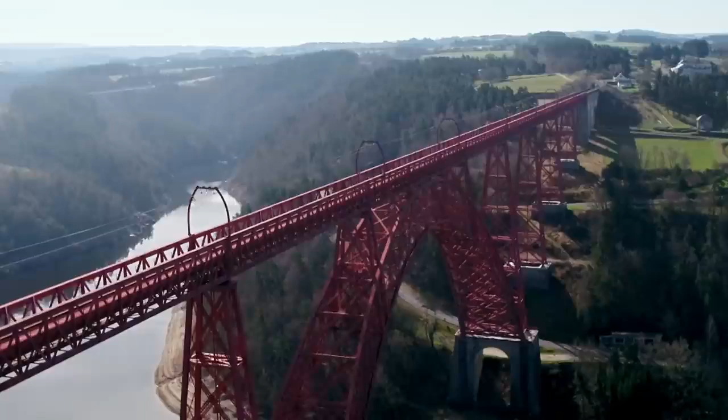Reaching the world on the other side, crossing the bay. First a curiosity, then a necessity, one which has urged man from the dawn of his history to develop construction methods that enable him to cross barriers. But bridges are more than just technological feats. They are links between men.

Leah Bello is a geophysicist. She'll be following in the footsteps of exceptional builders, revealing the secrets behind the construction of iconic works, and discovering the challenges faced by engineers who build even higher and even further.

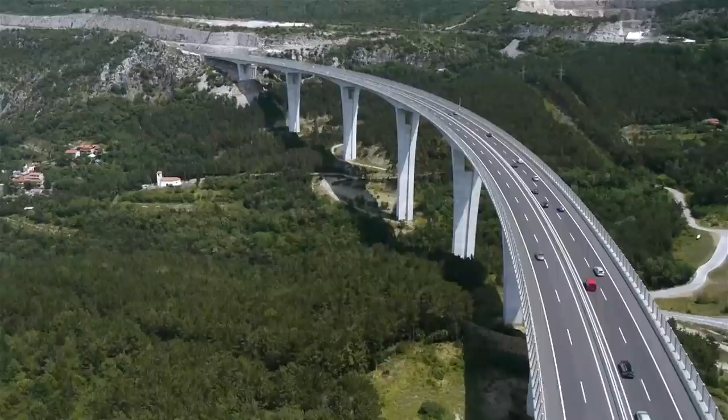No engineer in his right mind would have chosen this place to build a bridge. Unfortunately, that was where a bridge was needed. A scientific investigation to discover how men design and construct civil structures. True expressions of human genius to bridge the gap.

Leah Bello first heads to northeast India and the state of Meghalaya to discover a hidden treasure. Located on the border with Bangladesh, a third of the state is covered by dense, damp forest. Numerous streams wind through the valley, representing obstacles for the movements of the villagers. For almost 500 years, they have intelligently tamed nature by building bridges, using the roots of living trees.

Be careful, it's very slippery. Slowly. Here is the bridge for you, the living root bridge. See the roots. It's like something out of a fairy tale. Is the bridge still in use? Every day. Every day we have people living in the village on the top. They come through this to go to their garden. Monsoon time, it's so much water. Without this bridge, they cannot cross this.

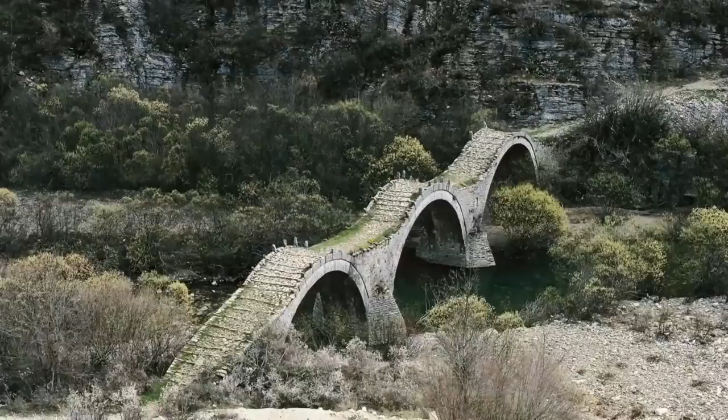The first bridges in history were all built using plants or plant-based materials, vines, rope, wooden planks, and so on. Primitive bridges, which are still constructed and maintained in some parts of the world, like in the foothills of the Himalayas. In less forested areas, man turned to a more resistant material, stone. Some of these prehistoric bridges still stand today. During the final millennia before our era, stone dominated the history of bridge building until the Romans perfected the art.

For almost 5 centuries, the Roman Empire reigned over Europe and the Mediterranean. To expand their territory, the Romans developed an important network of roads and bridges. This construction-minded people built numerous large-scale structures in stone, some of which are still standing after 2,000 years, like the Pont du Gard in the south of France, which was constructed in the middle of the 1st century of our era.

Its dimensions are impressive, 47.6 meters high, with a span of 275 meters. This iconic vestige is the highest elevated Roman aqueduct bridge in the world. From the bottom up, its 3 tiers have 6, 11 and 35 arches respectively. Vaulting has been used since the Mesopotamian period, but not all the time. The solution discovered by the Romans was to build semicircular arches with centering, with the lateral thrust exerted on piles with very strong foundations. This produced much wider arch spans, from a few meters to 35 meters across.

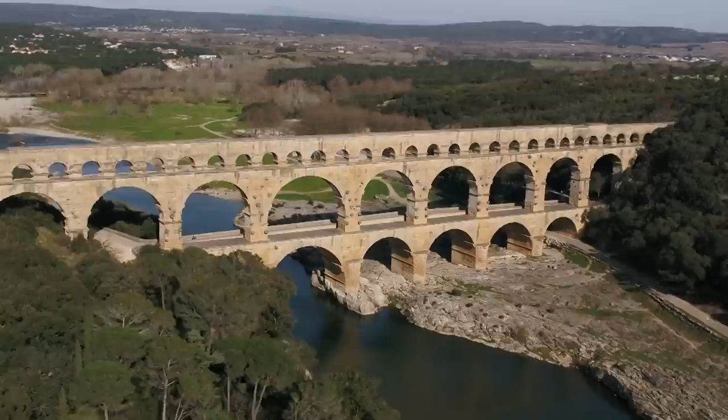Once the piles were sunk into the riverbed, the next task was to construct the archways. The semicircular vaulting forms a structure which can span an empty space with successive arches. To build the arches, a solid support was needed, known as a centering. This constituted 2 wooden semicircles with the same form as the intended arch and served as the framework. The blocks of stone were then laid on top of the wooden centering until the last one, the keystone.

On the first tier of the bridge, the arches were thus formed with 3 parallel sections of stones. This form allowed the Romans to build arches with unprecedented spans. But it did have its limits. If an arch were to span more than 40 meters, the quantity of stone would be too heavy and the vaulting would collapse under its own weight.

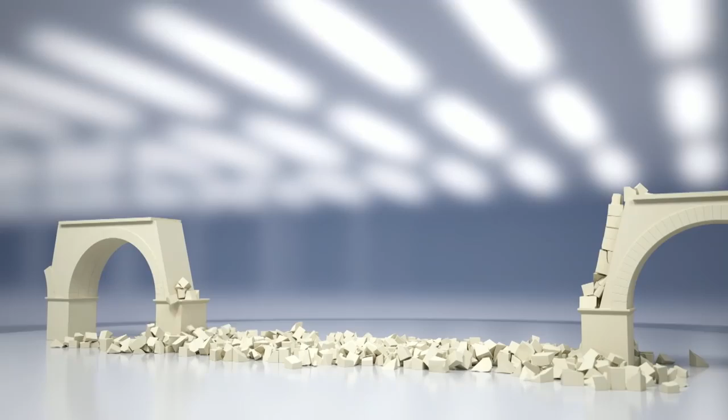It's often said that the Romans were the greatest builders in antiquity. But what do we know about the exact construction techniques and methods they used? We know a huge number of things, but not everything. Firstly, their construction techniques were absolutely remarkable. Their level of engineering clearly surpassed that of the ancient Greeks, who were also great engineers. And Vitruvius, the Roman architect and engineer, left us the only known book on the subject, which we can now consult for all our studies of the archaeology of antiquity.

Vitruvius was the author of the only surviving treatise on the architecture of antiquity. It's an exposé of the art of Roman construction, and it lists the tools and techniques employed by these master builders. From a theoretical point of view, we learn of their acute sense of proportion. The lines of their buildings form harmonious dimensions and employ incommensurable numbers such as pi or the square roots of 3 and 5.

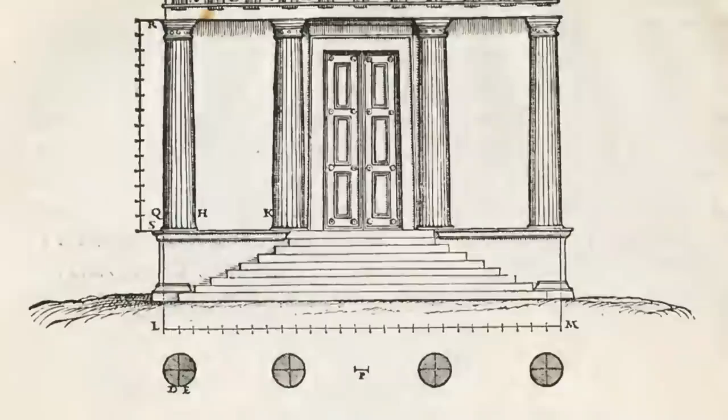The Romans set out to construct for eternity. Their use of infinite numbers actually enabled them to obtain the absolute. And also, thanks to this geometrical system, stonemasons also knew the methods perfectly. And so they could reproduce on the spot, on a much larger scale, of course, the plans which had been drawn by the architect.

While the Pont du Gard remains a model of aestheticism and architectural perfection, it was actually constructed for a very precise purpose: to bring fresh water to Nîmes, one of the largest cities in Gaul, with 20,000 inhabitants. The spring chosen was the Fontaine d'Eure, some 50 kilometers away from Nîmes. The distance wasn't a problem for the architects, but something else was. They had hoped to find a spring much higher up than the arrival point. But unfortunately, the Fontaine d'Eure was only 12 meters higher.

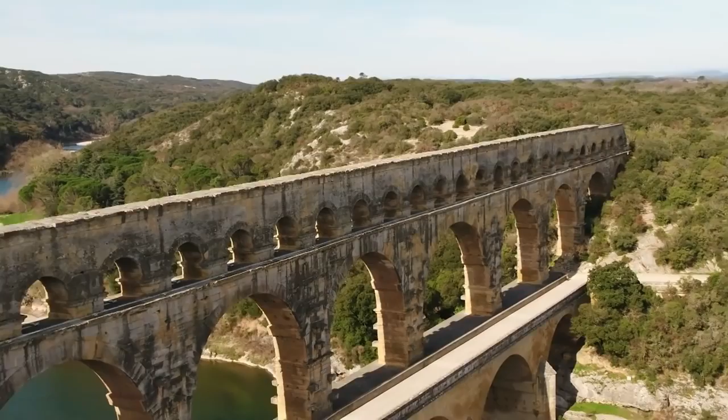That meant the builders had to construct an aqueduct with an extremely gentle slope, one of the gentlest in antiquity. How gentle was it? 24 centimeters per kilometer, a gradient equivalent to only 1 millimetre every 4 metres. And without expert calculations, it was impossible to ensure a regular slope along the full 50 kilometres of the aqueduct, especially across the Pont du Gard.

That means that you have a channel with a slope like this, fairly steep, followed by a very gentle slope, and then another steepish one. So in the central part, the bridge, water flowed much more slowly. So the result is the water rose in the channel, and once the aqueduct was in service, they realized that it overflowed from the Pont du Gard. So the original wall only came up to here, and to stop the water overflowing, they had to build up to here? Exactly.

This masterwork of antiquity supplied Nîmes with water for almost 500 years, until the fall of the Roman Empire. The construction of immense architectural and engineering works disappeared with the Dark Ages and was only resumed 500 years later, in around the year 1000, with the expansion of Christendom and the power of the Church. The builders of the Middle Ages readopted the techniques and methods of Roman architects.

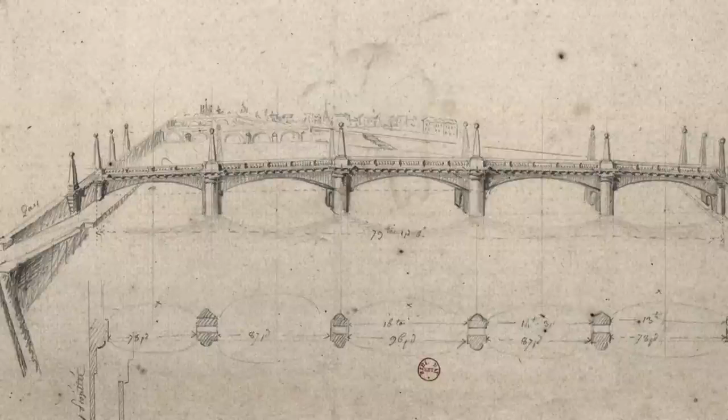But it wasn't until the middle of the 18th century that the first big technological break came, with Jean-Rodolphe Perronet. Considered to be the father of modern engineering, he was also the first to understand the true mechanics of a stone-arched bridge. He established that each arch was not freestanding from the others, and that the thrust was shared between the spans. This crucial observation meant that the thickness of a bridge's piles could be considerably reduced.

Perronet halved the thickness of the piles. He developed an understanding, somewhat systematic, one could say today, of how bridges functioned. So he built bridges in a different way to traditional ones. With his bridges, the thrust of each span kept the others in equilibrium, unlike the Pont d'Avignon, where if one arch collapsed, others might yield. The arches of the modern bridge were much more interlinked, and the thrust went from arch to arch, right to the abutments. Stone thus dominated the history of bridges until the Industrial Revolution.

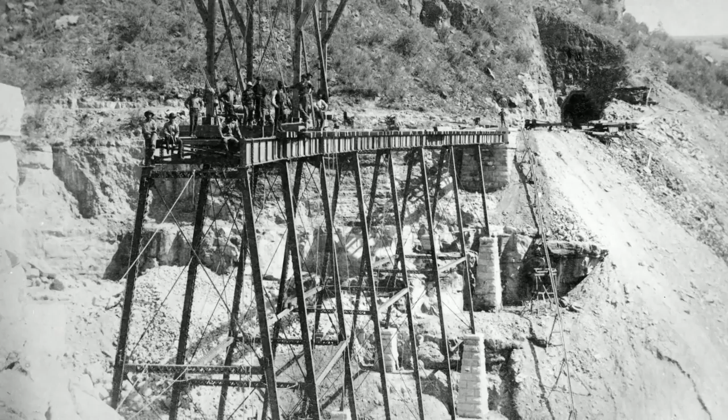In the late 18th century, early 19th century, the mastery of iron allowed engineers to design structures with new profiles. Iron was the great revolution for bridges. It was about 60 times more resistant to pressure and thrust than stone, and that would lead to considerably lighter structures. Iron resisted tensile strength as well as pressure. That meant that architects could finally drop the arch, which had been the dominant form of bridges since Roman times. Iron enabled builders to construct bridges with triangular crossbars. Both lighter and more resistant, bridges could span even greater distances.

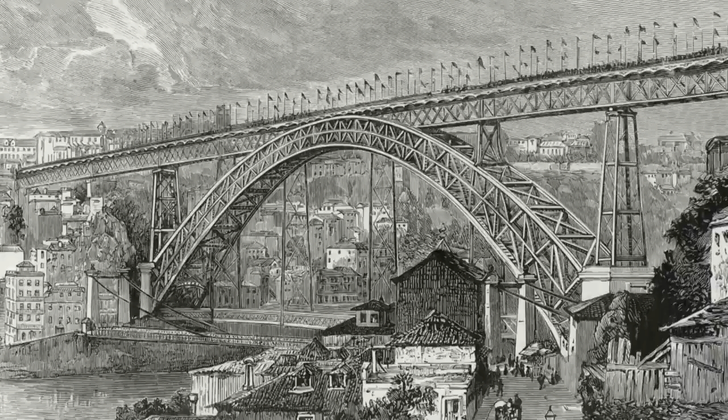The rapid development of the railways demanded new technological solutions to cross rivers and valleys. Engineers stopped at nothing, like spanning the deepest gorges where no one had ever dreamed of taking on nature, and bridging the gap. The Garabit Viaduct is a striking example of this daring. It was designed by Gustave Eiffel, a visionary engineer and determined architect, whose solid yet elegant bridges reached heights that gave his contemporaries vertigo. Located in the heart of the Massif Central, the Garabit Viaduct crosses extremely undulating terrain. 565 metres long and 120 metres high, the rail bridge rests on 7 piles and a single main arch with a span of 165 metres.

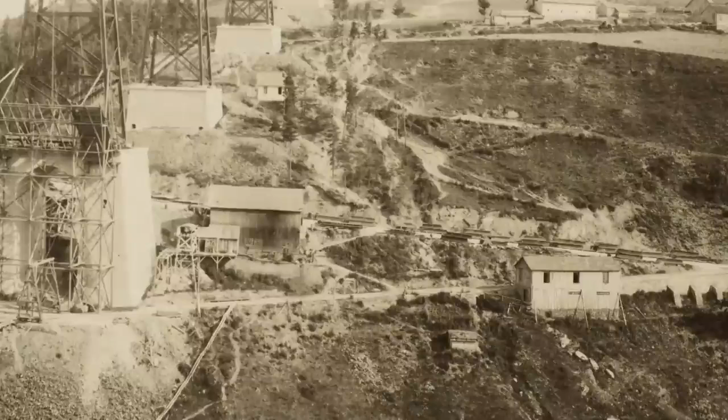What was there here before the construction of the bridge? Nothing. At Garabit, absolutely nothing. They had to lay new roads just to get to the site. Then they had to construct accommodation for the men who would work on the viaduct. Why construct a bridge where nothing existed? So that the train, with its passengers and goods, could reach the region. As rail was developing everywhere in France, there was still no line through the Cantal department linking Paris directly with Béziers, without skirting around the Massif Central.

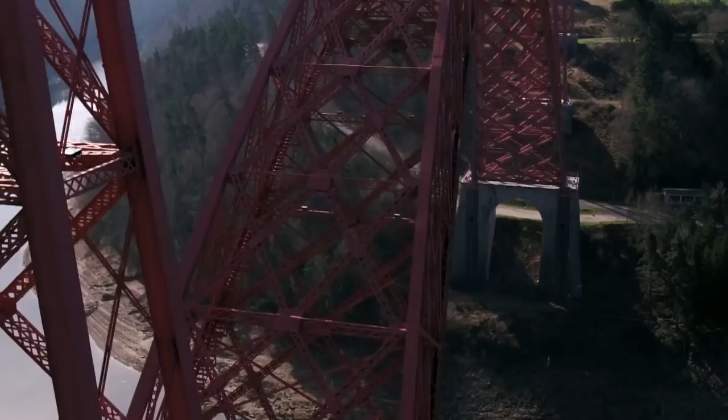Here it is. Wow. The gigantic worksite began in 1880. The viaduct was erected in just 4 years, an incredible technological feat for the time.

Keep going. Almost there.

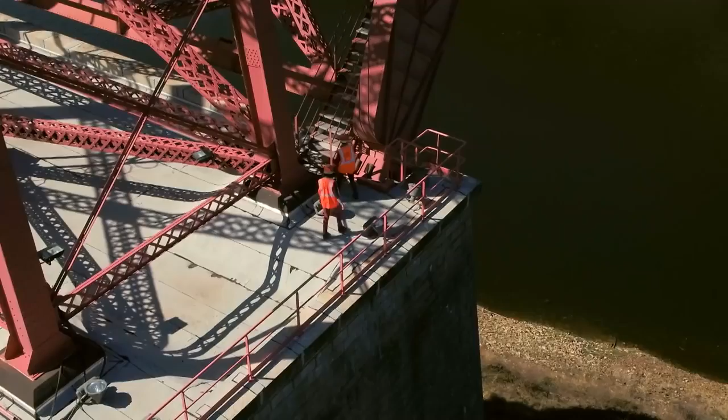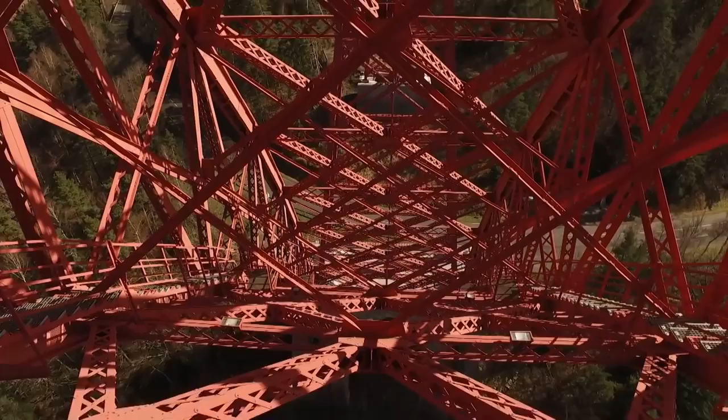The Garabit Viaduct was the testbed for revolutionary technology, and it was while constructing this bridge that Gustave Eiffel patented his famous lattice girders, used several years later for the Eiffel Tower. The structure is mesmerizing. Totally fascinating. And in the signature Eiffel style, with the open lace girders. Which allows the wind to pass through. That's right. It's a very airy structure.

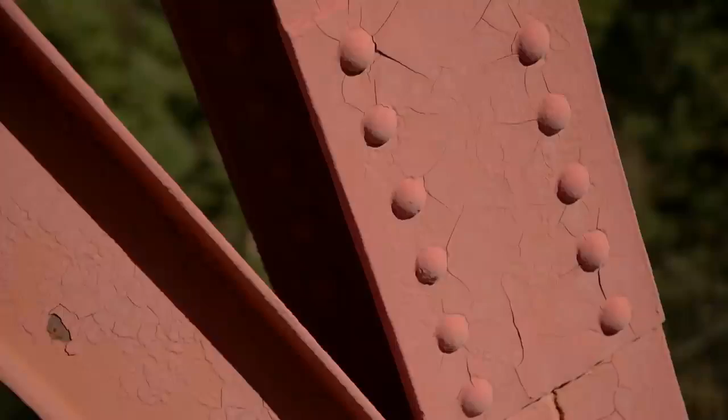How was it constructed? Was the whole thing just assembled here? Half of it was pre-assembled in the workshops in Levallois-Perret near Paris. The other half was hot riveted together here in Garabit. The wrought iron girders were assembled with rivets, these small, shafted iron fasteners inserted between each piece of the structure. Once heated to red or white hot and the tail of the rivet has been hammered flat, they hold the pieces together when they cool.

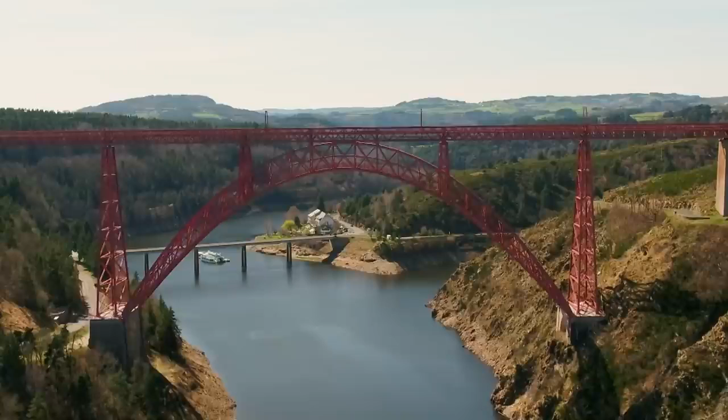Once the bridge was finished, it must have been a huge event for the region. Yes, and not only for the region, but the whole civil engineering world. The bridge was marveled at, due to its height, as far as the United States. It's one of the 2 most talked about works by Eiffel among the 100 he built around the world. The Garabit Viaduct and the Eiffel Tower, erected 4 years later, are testaments to Gustave Eiffel's genius and perfect mastery of iron.

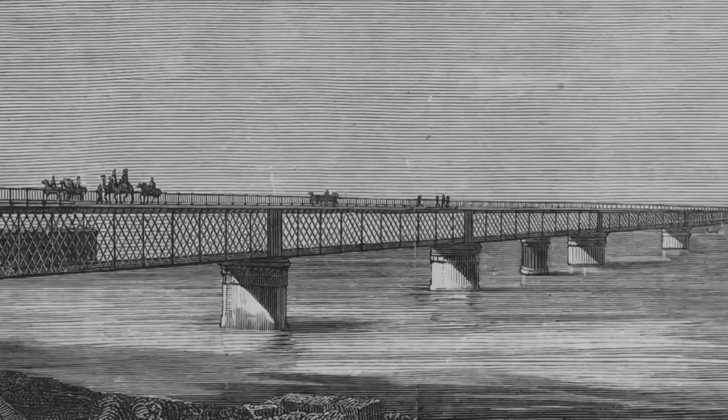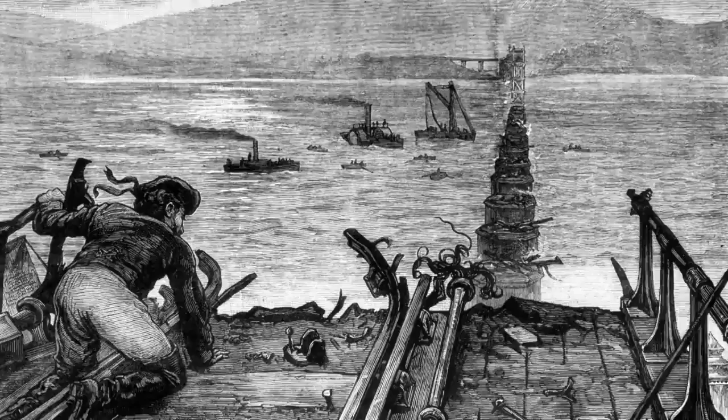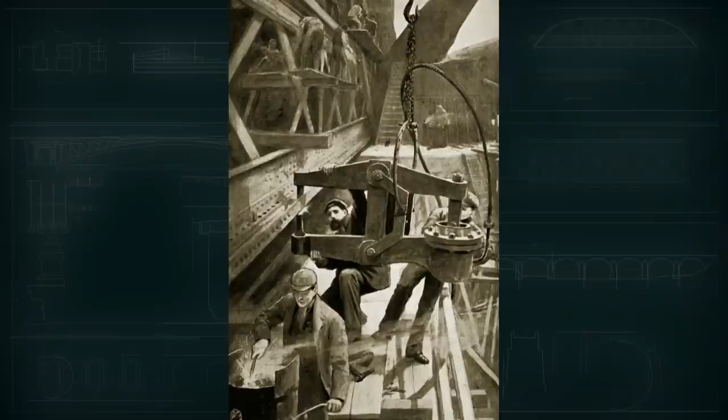Engineers turned to a new, much more resistant material, steel, an alloy of iron and carbon, the development of which took metalwork from the domain of craftwork into that of science. One, high-quality steel has far superior mechanical qualities compared to iron, so you can go much further with it. Two, it had a big impact from the early 20th century on because, unlike iron, it could be welded, and that would totally transform assembly technology.

Today, no one would even imagine building a large work of engineering without steel. Steel opened the door to rapid technological progress. Across the globe, sleek-looking bridges sprung up across rivers, breaking records with spans of several hundred meters, like the Forth Bridge in Fife, Scotland.

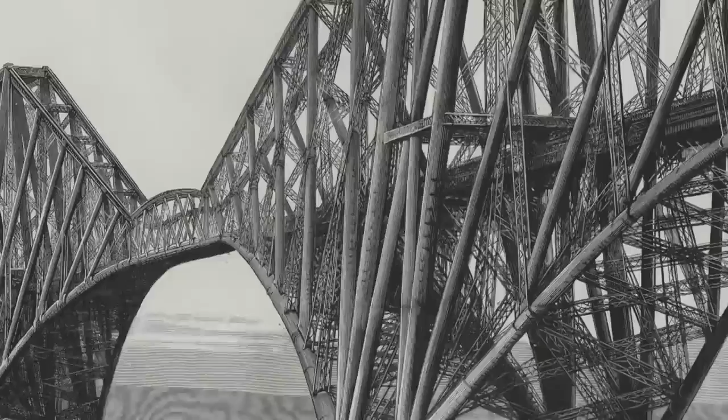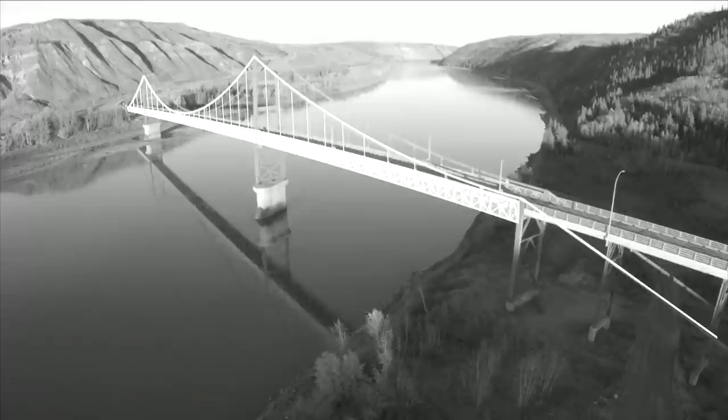But back to the early 19th century, another method of construction was born in the United States: the suspension bridge. Bridges where the road deck is hung below wire suspension cables, firmly anchored in abutments on the riverbanks. The suspension bridge is a very simple idea, and it's not that complex to construct.

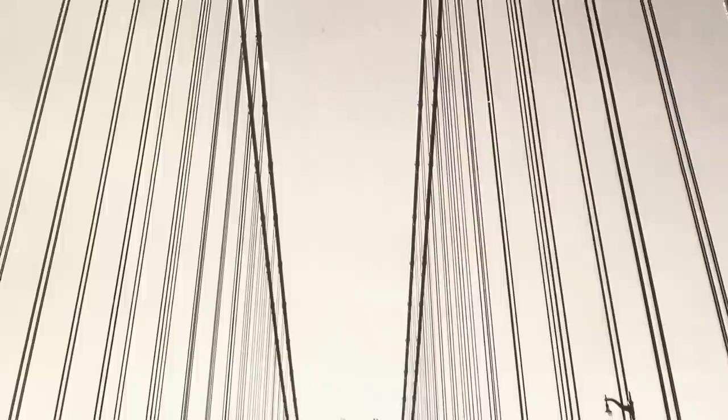The main thing back then was to make sure the steel used in wire cables was of good quality so that they wouldn't snap. There was a lot of debate because for a long time bridges were suspended by chains, then by cables, then by modern groups of cables. With cables made of steel, suspension bridges became all the rage. But it was the daring of a German-born engineer which would give the United States one of the wonders of the modern world: the Brooklyn Bridge in New York.

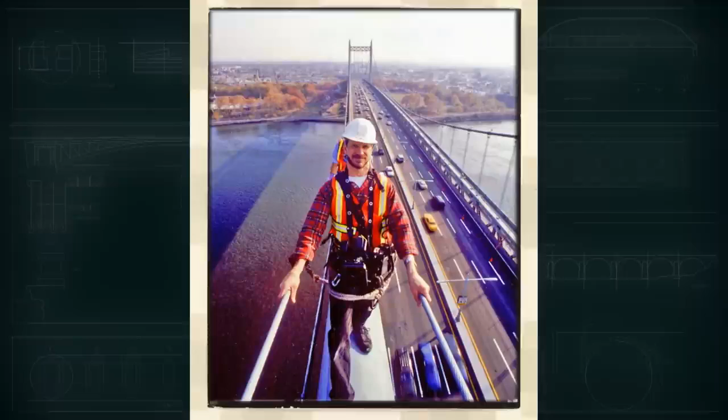To better understand how this bridge changed the history of engineering and that of New York, Leah Bello joins Dave Frieda on the banks of the East River. This photographer, a specialist in bridges, is a fountain of knowledge when it comes to the Brooklyn Bridge. This legendary bridge, 1,825 meters across, beat all span and height records. Construction started in 1870, giving rise to an era of ambition and sacrifice of an entire family: the Roeblings.

John Roebling, who designed the bridge, unfortunately didn't have a chance to see his bridge completed. He was surveying the footings for the bridge on the south side of the Brooklyn Tower. A ferry had come in, he didn't see it, and it crushed his foot. And the only treatment he wanted was pouring water on it. Unfortunately, he died of tetanus. So his son, Washington Roebling, then took over as chief engineer. So Washington was the one who actually built the bridge.

He went down into the caissons to help the men dig out the muck and the rocks below. He wanted to be part of the team. But they didn't know, again, about caisson disease, about the change in air pressure. He wound up being laid up in his bed, in his bedroom, so his wife, Emily Roebling, then transferred all the information from him, Washington, to all the workers.

So Emily Roebling was very instrumental in helping build the Great Brooklyn Bridge. She was one of the first women civil engineers that really helped. What she did was absolutely incredible. I think without Emily Roebling, you wouldn't have the Brooklyn Bridge today.

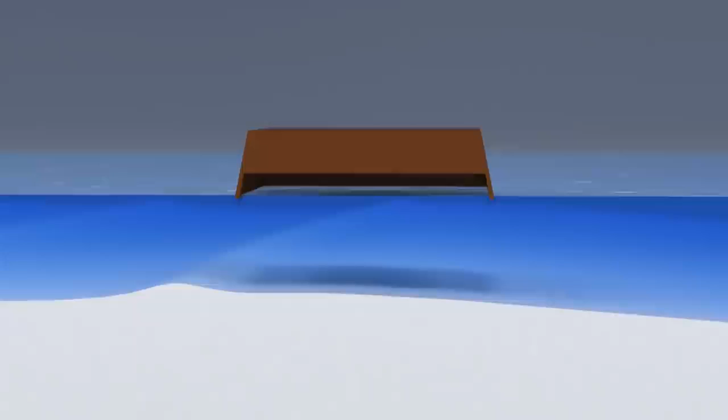The imposing blocks of granite for the towers were laid on top, which gradually sank the caissons to the riverbed. Once there, at a depth of 30 meters, compressed air was injected into the giant boxes so they could resist water pressure. In this damp, cramped, pressurized space, laborers dug for several months in order to anchor the piles in the bedrock.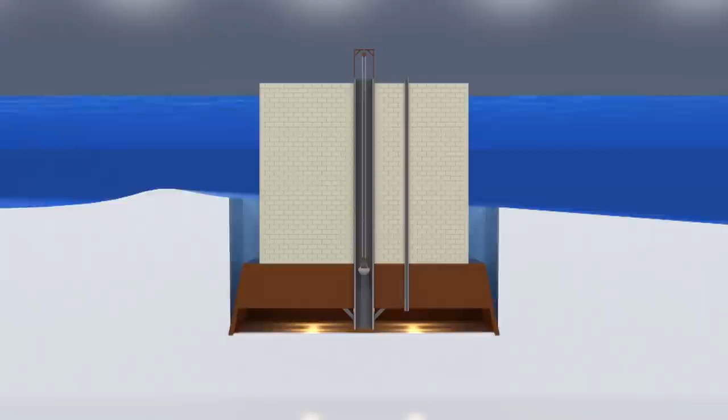The rubble and mud rose to the surface via a central conduit. And within only 4 years, the two towers had begun to rise from the East River. At the time, little was known of the effects of pressure on the human body. Contractors and workmen began to suffer from strange illnesses.

The caissons on the Manhattan side were at 30 meters deep, which means the pressure inside would have been 3 times more than surface pressure. That must be what made it so dangerous for the men working inside when they returned to the surface.

Yes. Now, I used to scuba dive, so I know the dangers of decompressing. If you come out to ambient pressure too fast, it's like opening a soda bottle. Open the top too quick, the gases come out too fast. That's the same thing with the nitrogen in your blood. It would come out, it settles into the joints, it's extremely painful. So they now know you have to come out into ambient pressure very slowly.

They didn't know that back then, so they called it caisson's disease because almost everyone that went into the caisson came out in extreme pain. A lot of men died. Despite the numerous challenges, the 90-meter tall towers were completed in 1875, and the installation of the cables could begin.

These are the 4 main cables. These main cables are what holds up the road deck. Each cable contains wires like this. 5,434 wires make a 15 3/4 inch cable. Each cable can withstand the pull, tension of 25 million pounds. They were anchored in anchorages on both sides of the bridge.

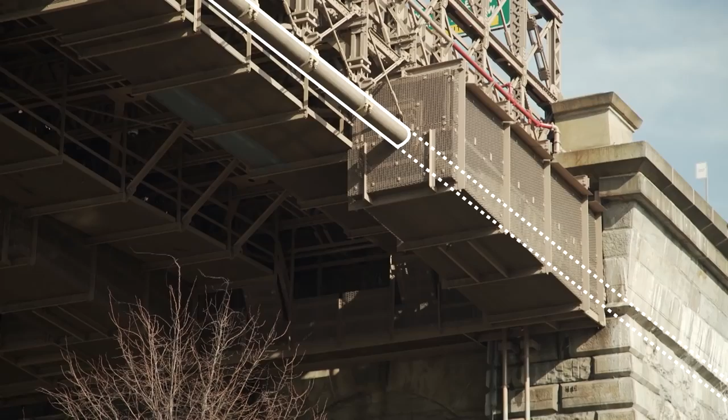The main cables are original. Some of the engineers I know worked on the bridge, and the cables, which are made of wire like this, are in great condition. They're galvanized. This was the first suspension bridge in the world to use galvanized steel wires. It's steel coated with zinc. Zinc oxidizes, but it doesn't rust, and it protects the steel underneath it. So this could last for 200-300 years, easily.

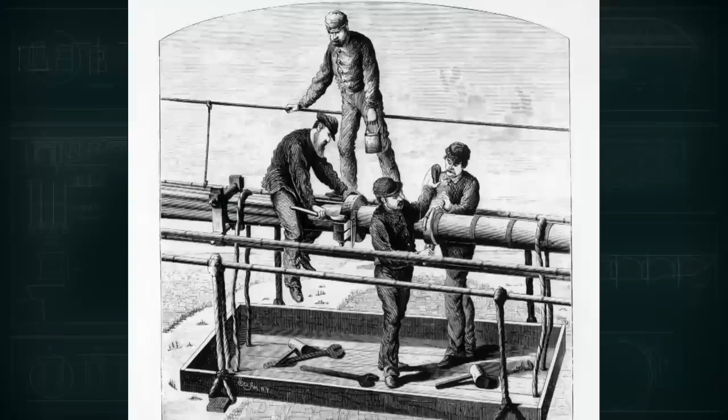To prove the solidity of the cables, master mechanic E.F. Farrington crossed the East River suspended from them. In all, 23,000 kilometers of cables were installed. After 14 years of work, the bridge was finally completed. Its inauguration on May the 24th, 1883, was a national event.

All of New York was invited. The president was here, the mayor was here. It was called Decoration Day. The entire city basically shut down to celebrate the opening of the Brooklyn Bridge. A week later, there was what's called the Bridge Stampede. Someone had tripped a week after Decoration Day, and people thought the bridge was collapsing, and a lot of people were trampled to death, unfortunately.

So to compensate for that, P.T. Barnum had a whole herd of elephants walk across the bridge. And that proved to the public that the bridge was very safe. I believe this bridge can last for centuries. It is a marvel of engineering. Hopefully many future New Yorkers and other people around the world will be able to see this great structure.

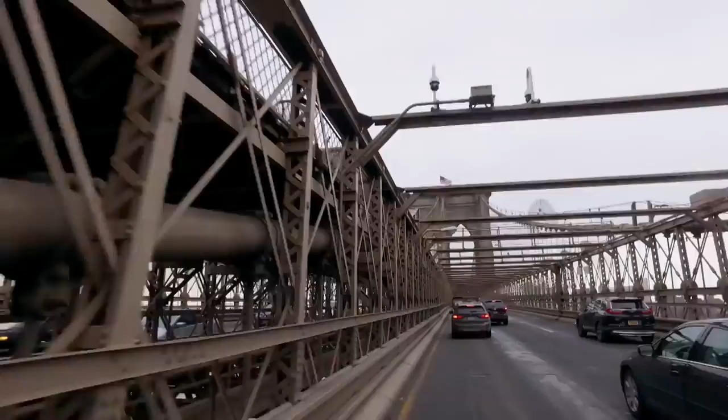The Roeblings' Brooklyn Bridge is now known the world over and is one of New York's most iconic landmarks. Over 130 years later, it's still standing, a genuine work of prowess, given the know-how of the time. It inspired other famous large bridges, like the George Washington Bridge on the other side of Manhattan, and the Golden Gate in San Francisco. But other bridges have proved less long-lasting.

The first Tacoma Narrows Bridge in the state of Washington would collapse under the effects of a suspension bridge's main enemy, the wind.

Last July, the nation hailed the opening of the new $6.5 million Tacoma Narrows Bridge over Puget Sound.

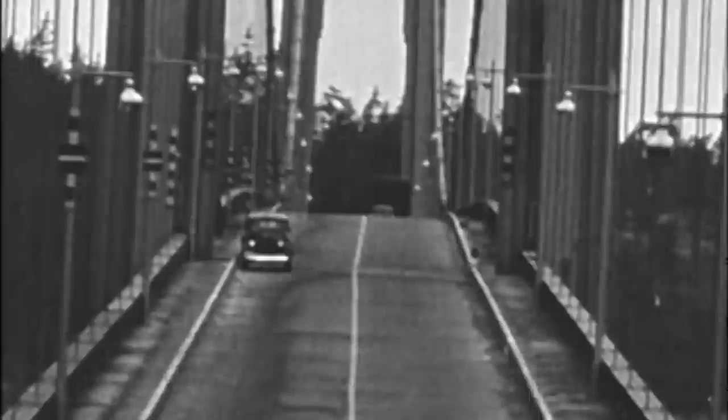This is the opening of the Tacoma Narrows Bridge, right? Yes, it was inaugurated on July 1st, 1940, and the bridge started oscillating up and down from the outset. During the summer of 1940, people visited the bridge just to see it swaying. It became a tourist attraction. And it became famous. Yes, from the very beginning.

Except that in November, there was the first storm of the fall. It wasn't a big storm, but there were winds of 70 kilometers an hour through the strait. And instead of oscillating up and down, the deck started to twist. From one side to the other, there was an amplitude of almost 9 meters. And after an hour, at about 11 o'clock in the morning, the whole central section gave way and collapsed into the Tacoma Narrows.

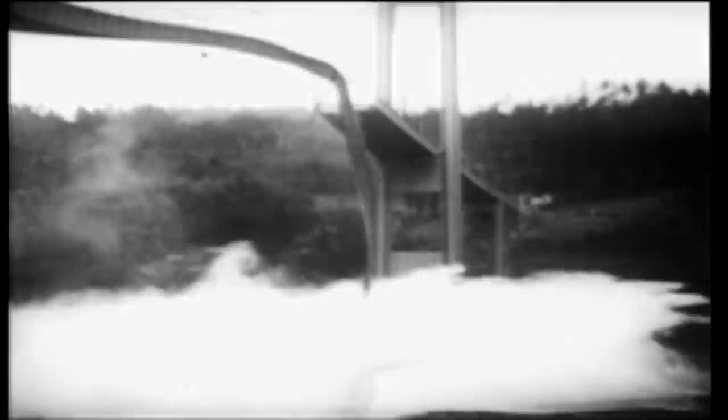Oh yes, there it goes. Which leaves us with a marvelous example of how not to build a suspension bridge. One of America's finest structures.

Fortunately, the collapse of the bridge claimed no victims, except for a terrified dog locked in the car in the middle of the bridge. Not a person was lost, but it's a real tragedy.

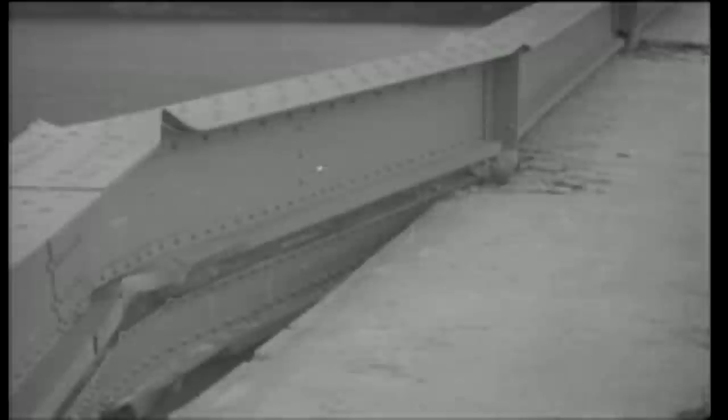When the wind blew on the Tacoma Narrows Bridge, air pressure was exerted on the edges of the deck, transferring its energy into the structure itself and causing the roadway to bend and sway.

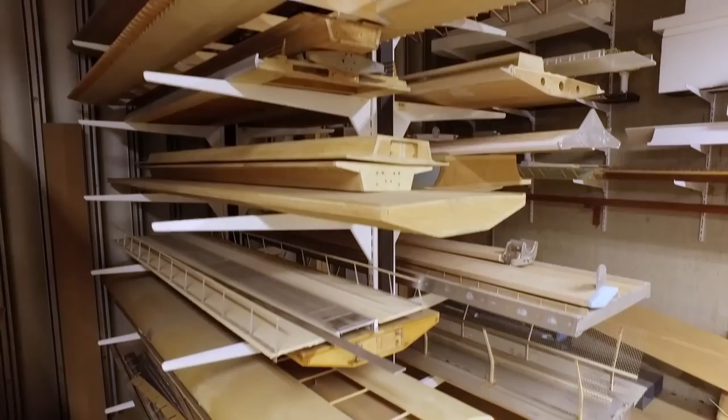After the collapse of the bridge, architects and engineers began to study much more deeply the impact of the wind on bridges. But it wasn't until the 1970s that aerodynamics became a science in its own right. From then on, the decks of bridges were streamlined to facilitate the flow of air around the structure so as to prevent any risk of swaying.

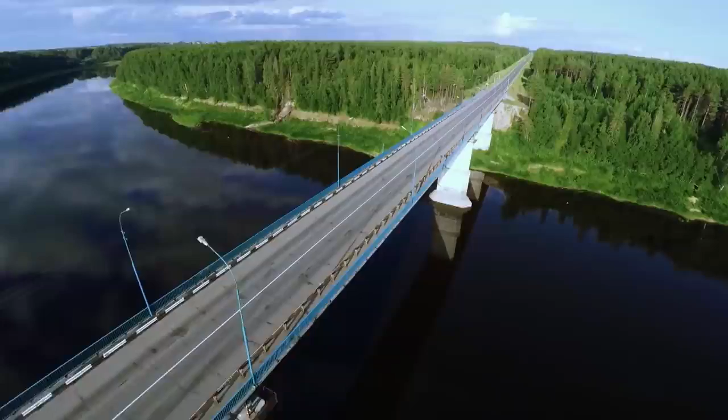With the invention and mastery of new materials, during the 20th century, man would be able to build longer, higher bridges with even more impressive dimensions. It was the age of concrete, the king of bridge building, and much cheaper than steel. And it would benefit from a revolutionary process developed by French engineer Eugène Freyssinet, which was perfect for civil engineering works: pre-stressed concrete.

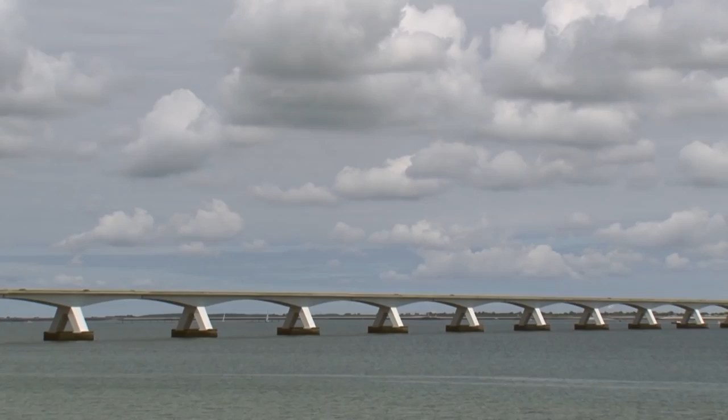Pre-stressed is concrete that has been compressed so that the traction exerted on it is more than compensated by the stress exerted on it. For example, if you make a beam out of sugar cubes, it won't resist traction at all. But if you compress the cubes, you can then place a small object on them, say an eraser, and the sugar beam will hold firm, because the disintegrating effect produced by the eraser's weight is nullified by the fact that the cubes are more tightly packed together.

This new material has been used on most of the bridges which stand today, and it would be used in hybrid bridges, such as cable-stayed bridges, constructed with a mixture of concrete and steel. A cable-stayed bridge doesn't need the expensive anchoring of the suspension bridge because the deck is no longer suspended from a gigantic main cable, but supported by a series of individual cables running directly from the pylons.

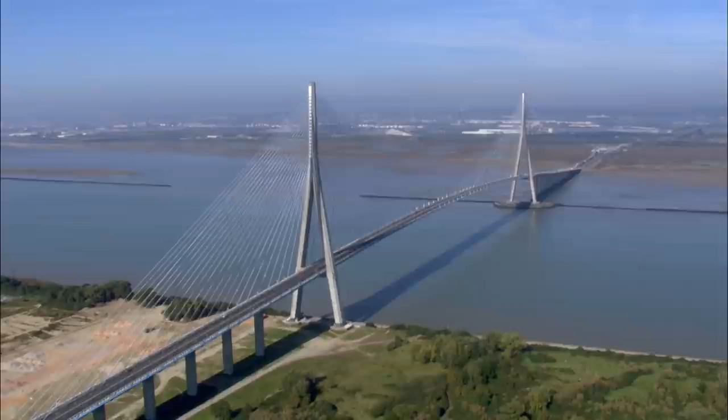This new model spread across the globe in the second half of the 20th century, breaking all kinds of records, like in 1995 with the Pont de Normandie and its span of 856 meters. Nothing seemed able to halt the ambitions of architects and engineers. Not even the wrath of nature, which has managed to destroy a number of their bridges, like during the earthquake in Kobe, Japan in 1995.

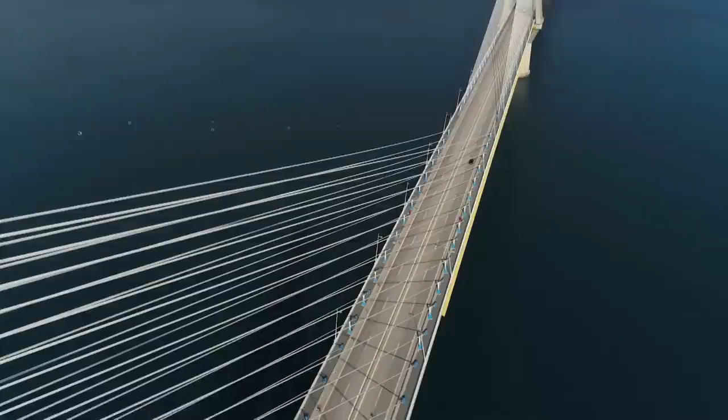Across the Gulf of Corinth stretches the Rio Antirio Bridge. It links the Peloponnese to mainland Greece at a point where 2.5 kilometers separate the two shores. The region sits between two tectonic plates, making it one of the most seismic in Europe. No engineer in his right mind would have chosen this place to build a bridge. Unfortunately, that was where a bridge was needed. Project director Jean-Paul Teyssandier worked for over 5 years with overseeing engineer Gilles de Maublanc. Together, they came up with unprecedented solutions.

The first difficulty was the depth of the water, 65 meters. That's no longer the field of bridge building, but of offshore engineering. Secondly, the seabed was of a very poor quality. And thirdly, there are faults that are constantly active, meaning the distance changes between the two coastlines. And during a strong earthquake, there could be a sudden change of several meters.

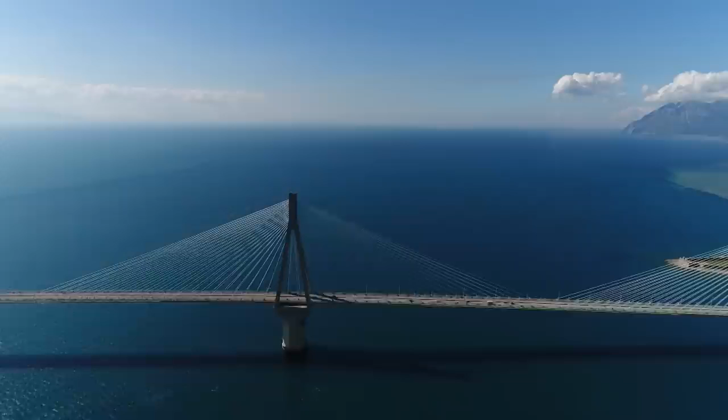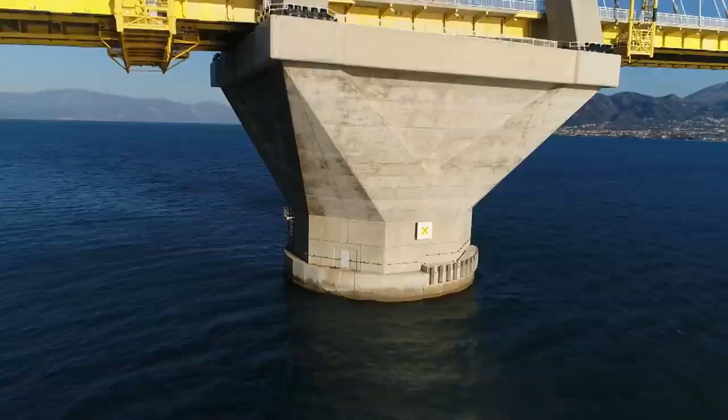When we discovered the scale of the work, we were sorely tempted to close the file and refuse it. At the same time, we liked the idea of facing a massive challenge, and we thought there must be a solution. The bridge has to be capable of withstanding earthquakes of up to 7 on the Richter scale. So the main challenge was to lay sufficiently solid foundations to ward off the wrath of the earth. But preliminary studies showed the seabed to be particularly unstable.

With the poor quality of the seabed, our first idea was the classic one, to dig down to find better quality ground. But after detailed analysis, we soon found out that the bedrock was at a depth of about 1,000 meters. So that was totally unfeasible and unrealistic. Then, after doing a lot of research, we came up with a totally innovative concept. Due to the extreme depth of the bedrock, the engineers soon abandoned the idea of laying foundations under the seabed. Instead, they decided to consolidate it using a brand new solution.

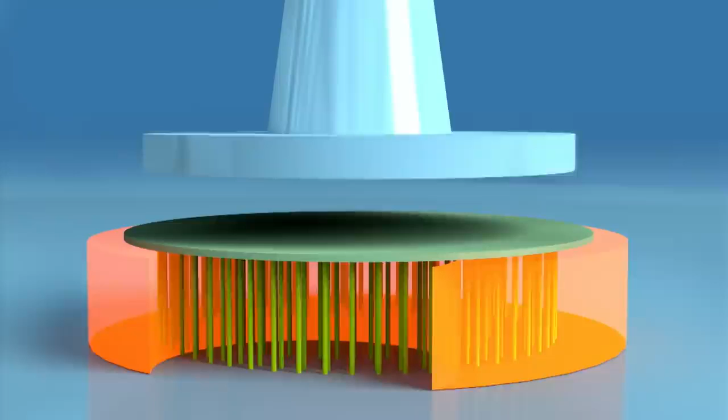Each of the 4 huge pylons rest on groups of 200 hollow steel pipes driven into the bed. The pipes measure 25 to 30 meters long, with a diameter of 2 meters. These were then covered with a bed of gravel, 3 meters thick, on which the foundations, called pier footings, simply rest. The dimensions of the footings are gigantic. Each is divided into 32 compartments and have a diameter of 90 meters.

They remain the biggest pier footings ever constructed. The Rio Antirio Bridge has another particularity. Rather than lower and upper pylons, there are pylons of a single block of concrete. The suspended deck is continuous from one end to the other. It passes between the pylons and is suspended by only 368 stays. It's a genuine floating roadway.

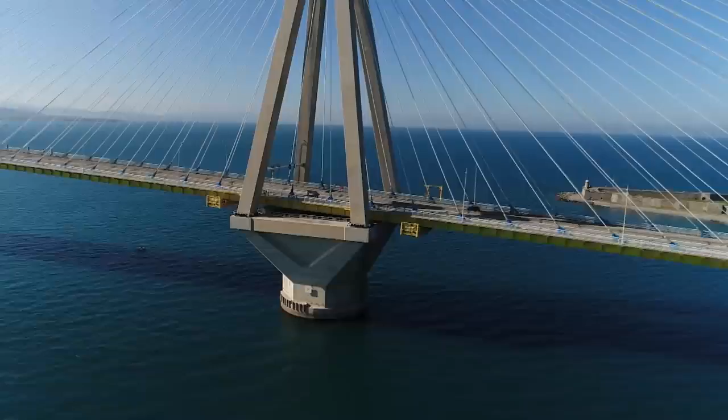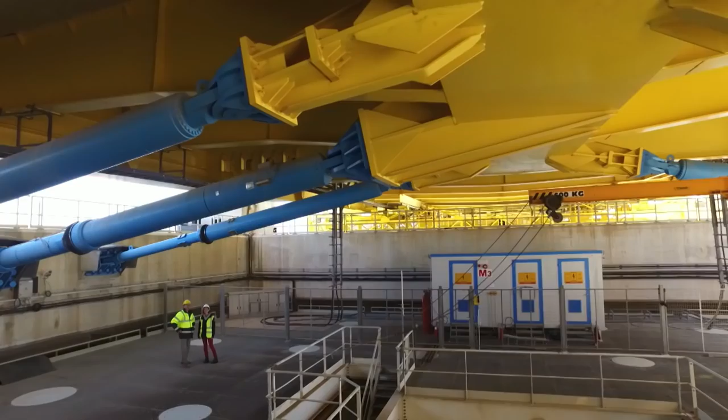So in case of an earthquake, it can gently sway. And to prevent the deck from hitting the pylons, the engineers had to come up with an ingenious system to stabilize the bridge. Let's start with the big central tube. It's a rigid tube, which holds the structure transversely in high winds. But for a major earthquake, which can't be withstood by the rigid support, there's a fuse inside which breaks, allowing the small tube to enter the big one.

So 1, 2, 3, 4 shock absorbers come into play. Very similar to the shock absorbers in your car. When you go into a hole, they absorb the energy. Beneath each of the pylons, the deck is maintained by this system of fuses and 10-meter-long shock absorbers. And over 400 different measuring instruments monitor the bridge's movements in real time.

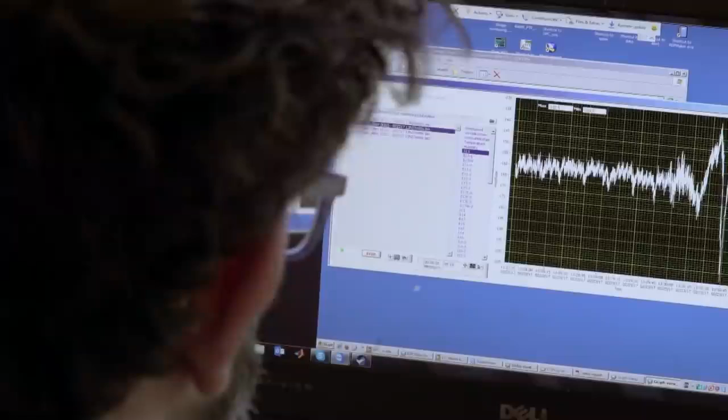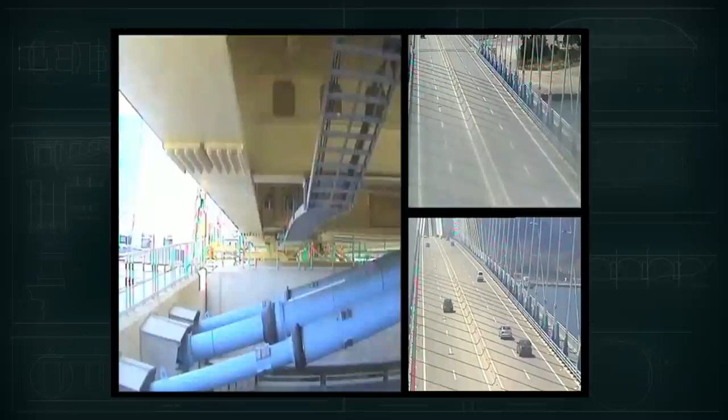On June the 8th, 2008, the screens suddenly went berserk when an earthquake of 6.5 magnitude struck the south of Greece. During the 2008 quake, things went according to plan. The connections broke, the shock absorbers absorbed the shocks, and the deck was allowed to sway freely. So it was a genuine life-size test of whether our project was well-founded or not. Thanks to the shock absorbers, during an earthquake, the deck can move laterally 3.5 meters without hitting the pylons.

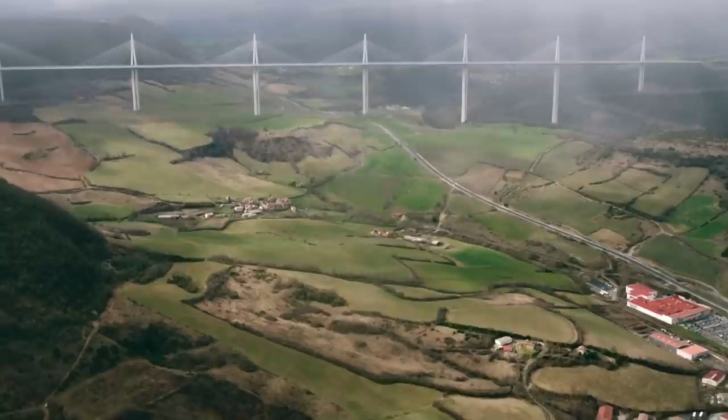Rio Antirio is an extraordinary bridge. Extraordinary because it's a bridge implanted in an extraordinary environment. Every bridge marks a victory over the elements: earth, water and air. And a number of them are veritable feats due to the uniqueness of the terrain they cross. In the majestic gorge valley of the River Tarn, in southern France, the Millau Viaduct has become the new world record holder of bridges, with its 2,460-metre cable-stayed deck 275 metres in the air.

It was constructed to free Millau of a curse: its constant traffic jams. But to reroute the highway, the new road would have to cross one of the deepest gorges in Europe, with a width of 2.5 kilometres. Michel Virlogeux is a graduate of France's top engineering school, the École des Ponts et Chaussées. He has worked on almost 200 bridges during his career. He's known as the father of the Pont de Normandie and participated in the design of the Vasco da Gama Bridge in Lisbon, Portugal.

At Millau, the complex geography of the valley was for a long time a real brain teaser for the engineer. Several routes were envisaged because we had to cross a large network of valleys. At the outset, the elevated solution, going from plateau to plateau, didn't come to mind because of the necessary height of the pylons. And then an expert road construction engineer said to us, "Why don't you stay up at the same level as the plateaus?" And we thought we're stupid, that's what we have to do. Never had engineers built so high up.

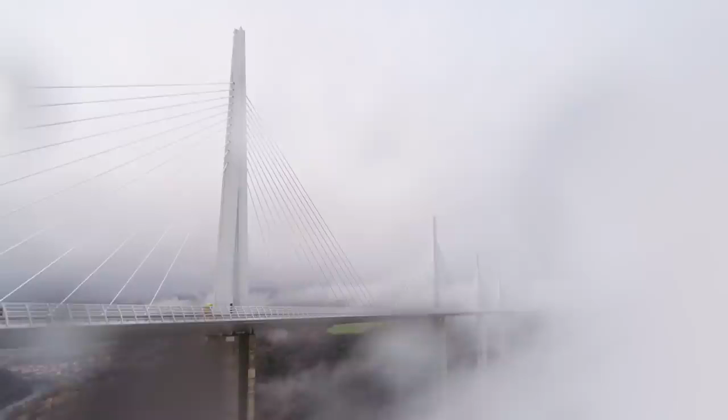Once the route was decided, the designer then had to imagine the profile best suited to the landscape. My idea was to construct a cable-stayed bridge with multiple spans. Why? Because for the bridge to be slender and transparent, cable stays would be the best. Plus, it's also the most effective structure to bear the load, allow larger spans and thus fewer pylons. With British architect Norman Foster, Michel Virlogeux's team worked on finalising the plans for the viaduct for almost 10 years. Work finally began in 2001.

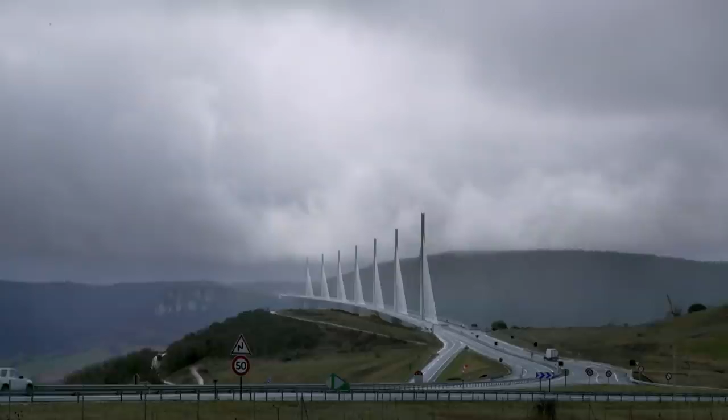A gigantic worksite on which Marc Buonomo worked as the engineer who oversaw the building of the metallic roadway. You feel tiny. Yes, you do. How many meters up is it? From here to the top, 245 metres. 245 meters. It's the tallest pylon in the world.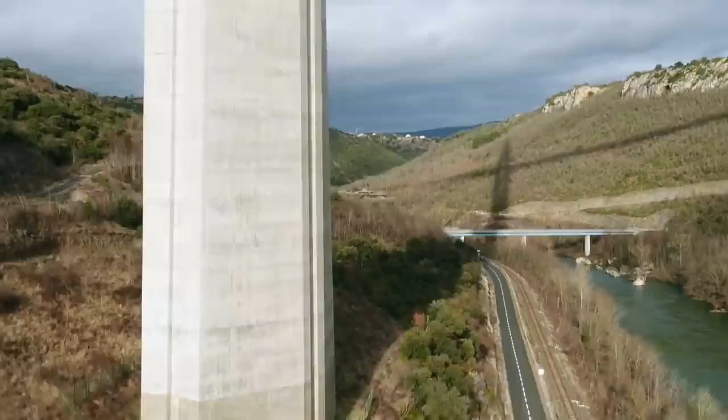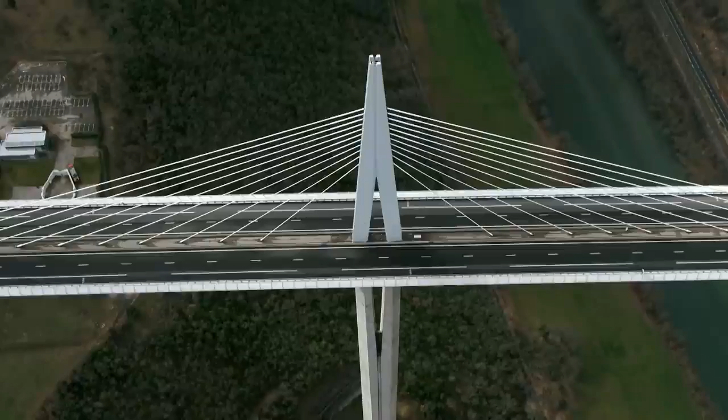With its 2,460-metre long deck, the Millau Viaduct is one of the longest cable-stayed bridges in the world. It rests on 7 pairs of piles and pylons, 342 metres apart. The bridge reaches a maximum height of 343 metres, making it taller than the Eiffel Tower.

What's the width at the base of the pylon? The base is the size of a tennis court, and the concrete is 5 metres thick. Underneath, there are 4 big piles, 18 metres deep and 4 metres in diameter. And all that anchors this pylon in the rock below.

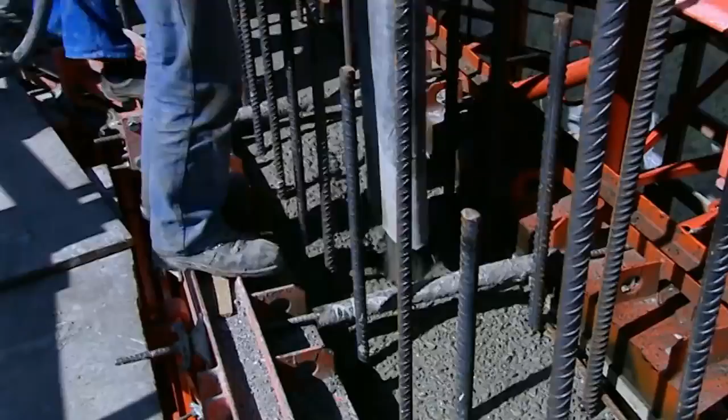During work, the 7 pylons were built at the same time to gain in speed. Each was given its own crane to pour in concrete. The pylons grew 4 metres every 3 days. In December 2003, 2 years after the construction began, the pylons were complete. Each of these splits in 2 for the last 94 metres, a characteristic shape that wasn't chosen by chance.

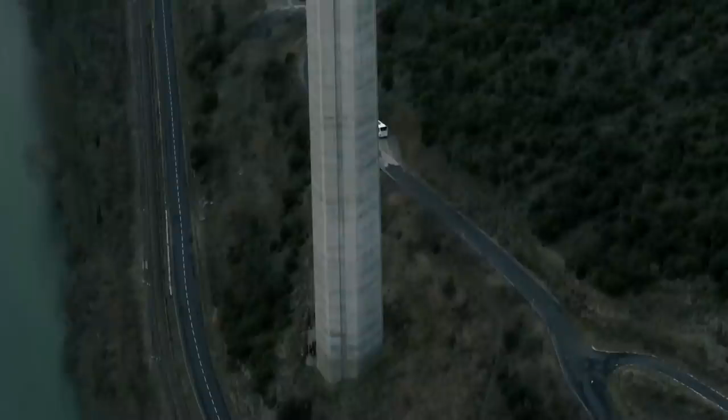A bridge, even when constructed to take limited deformations into account, remains extremely supple. So we had to choose a shape for the piles and pylons to give them the necessary rigidity to restrict deformations, while also allowing longitudinal dilations of the deck due to variations in temperature. It's to allow for deck movements that the piles and pylons divide into two slender shafts at the top.

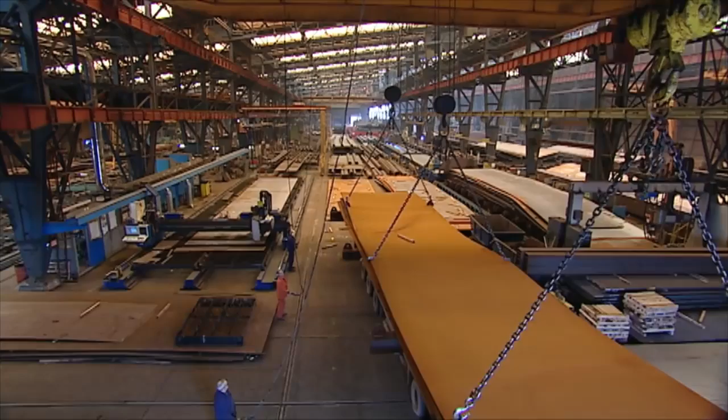The entire deck was constructed on the ground, in workshops on the plateaus either side of the bridge. 150 men, aided by robots, carried out over 1,000 kilometers of welding to assemble the steel roadway. How did you manage to get the structure in place? I came up with the idea of pushing it into position. Not a classic form of pushing, because the pylons are so high. The tallest is 245 meters. Plus, they're very flexible, so they wouldn't have resisted classic pushing.

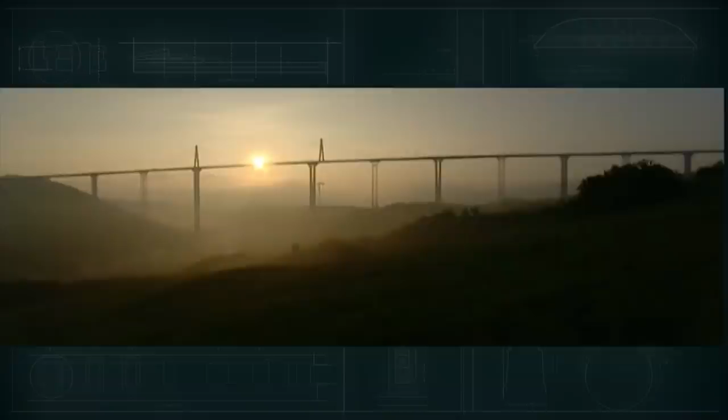So we invented a sliding system with wedge conveyors, our famous wedges. Each conveyor was made up of two wedges, which slide over each other with the use of jacks. The first lifting wedge slid under the second, supporting the roadway. This second wedge was then raised 2 centimeters, and as it was no longer resting on the piles, it could advance. Once in position, the first wedge slid again, the conveyor was back to its original position, and the cycle could recommence to advance the roadway 60 centimeters by 60 centimeters. Thanks to this system, the only one of its kind in the world, the north and south sections of the deck joined up in May 2004 after 15 months of sliding.

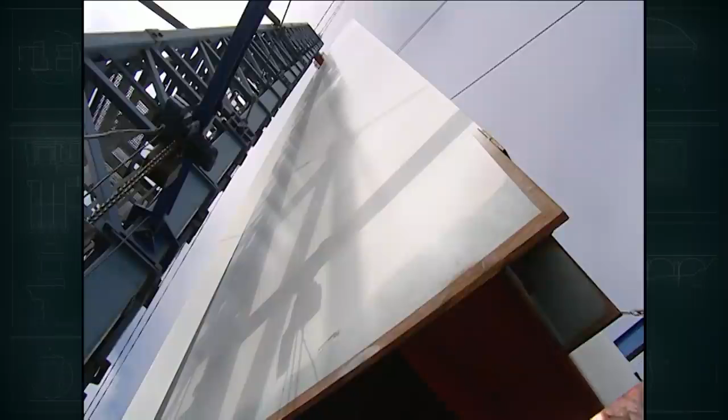To get the pylons upright, the engineers sought inspiration from ancient techniques and developed a tailor-made lifting system. They basically copied the model invented by the Egyptians to raise their obelisks at Luxor. Constructors must know all the techniques used for at least the past 4,000 years, whether they're Egyptian, Roman, 19th century, 20th century. When you mix all that together, you can build great works of civil engineering that will be part of the long history of human construction. So it's a blend of history and technology.

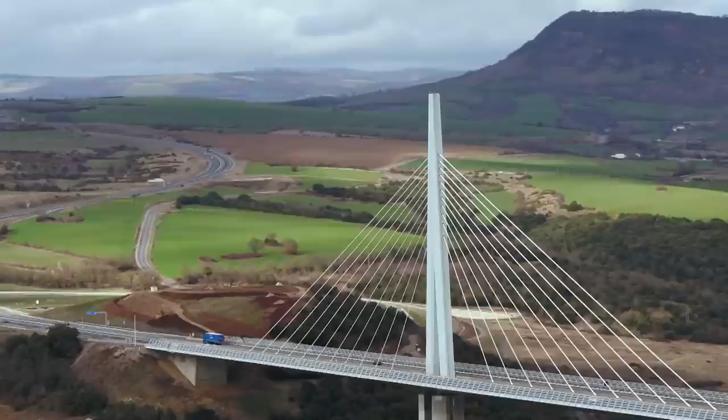After only 3 years of work carried out by almost 600 people, the completed bridge stood majestically above the gorge of the Tarn Valley. It was opened on December the 14th, 2004 by then-President Jacques Chirac, a proud memory for Michel Virlogeux. What really touched me about the occasion was when President Chirac got out of his car, looked at it and went, "Ah, that was fantastic."

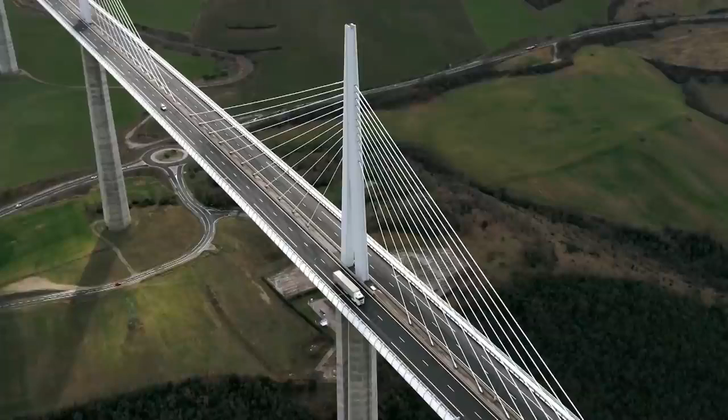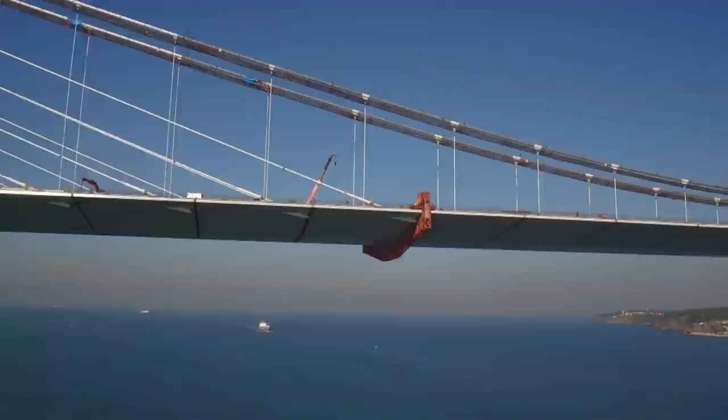More than 10 years after its construction, the Millau Viaduct still holds the record for the tallest pylon in the world. But in the past decade, other limits have been stretched. Recently, engineers have broken new records. With its pylons spaced 1,408 meters apart, the cable-stayed span record is held by the third bridge across the Bosphorus, designed by Michel Virlogeux in Istanbul. And China has recently broken the height record with a bridge culminating at 565 meters above the Beipan River. So are there any boundaries that can't be crossed?

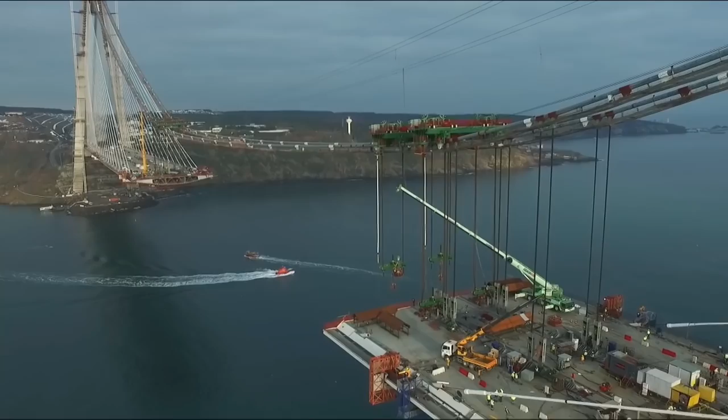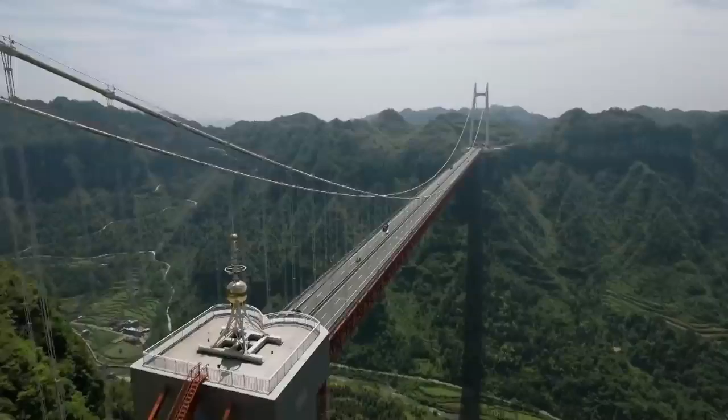I don't know how far we can push the limits. We could envisage wider and wider spans, but we'd need a new kind of material. Traditional materials, like concrete and steel, will eventually become too heavy for exceptionally wide spans. A suspension bridge with steel cables has its limits. The moment it can no longer bear its own weight, you have to stop. Things will continue to evolve, but in the short term, I don't foresee any major revolution.

Before erecting ever bigger bridges, engineers will undoubtedly develop new materials, but they won't depart from the founding principles which form the singularity of these works of engineering art. Beauty and efficiency. You need the two. And that goes back to the principles of Vitruvius 2,000 years ago, which are utilitas, firmitas, venustas. Utilitas is usefulness. A bridge must have a purpose. Firmitas is resistance. A bridge must hold and it must be long-lasting. And finally, venustas, which is beauty and elegance.